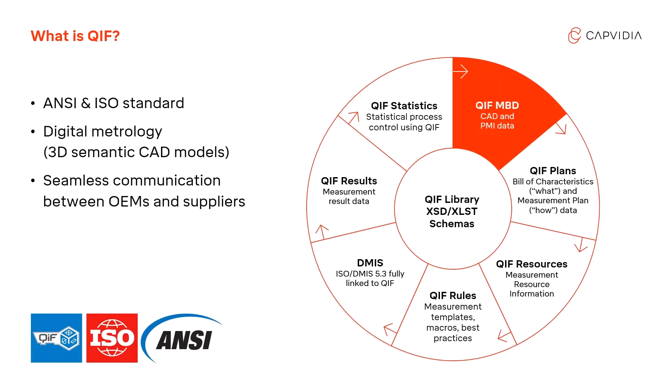You can think of QIF as a container for a lot of the information that's previously been kept in many other different formats. It contains visual part geometry, dimensions, tolerances, fabrication and measurement requirements, as well as inspection results. And it was created specifically to ease communication between suppliers and their customers. For now, we're going to focus on the question, why did you get a QIF file? Simplest answer to that question is model-based definition, or MBD.

To sum up MBD, when we say MBD, we're talking everything in the 2D drawing, dimensions, tolerances, notes, all of that is now in the 3D CAD model as the single source of all relevant product and manufacturing information, or we refer to that as PMI. Our focus with QIF specifically is machine-readable PMI.

What we mean when we say machine-readable is that you're not relying on a human to interpret the meaning of the requirements. So we're no longer relying on people to accurately duplicate design information that already exists when we get to the next step in our manufacturing process. Instead, we're transferring that information correctly and automatically using the QIF file.

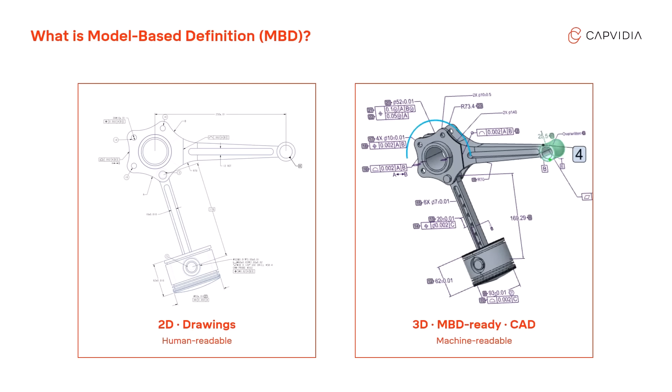The point of MBD, QIF, and all of these other Industry 4.0 buzzwords is really to enable automation downstream and reduce or even eliminate manual interpretation, the need for intervention, and the errors that come with those things. For example, ballooning hundreds of annotations on a part or assembly can take hours or even days to do manually, and often results in misrepresentations or misinterpretations. And machine-readable PMI is the start of a true MBD journey.

DoD mandates kickstarted MBD, and as a result of that, it's starting to cascade across manufacturing. Major OEMs like Lockheed Martin and others now publish supplier playbooks that outline their model-based enterprise strategies, and that includes model-based definition. And broadly speaking, that's why a QIF file just landed in your inbox from an OEM or a tier 1 or 2 supplier.

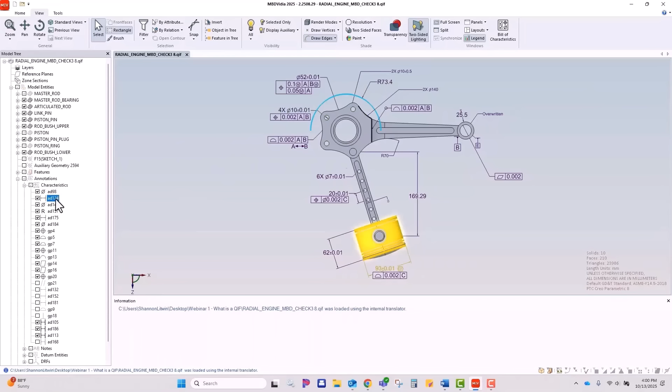If I want to go through each of these characteristics one by one, I can select each one, and this can be used for reviewing or for running various checks that you might want to do later. Now, all of these characteristics are what's called semantic annotation. Semantic annotation means it's not just human readable. You can also load it into an appropriate computer program like a CMM machine. We'll get to that later, and it will understand what these notations mean.

Another thing that I'll touch on very briefly are these saved views. Now, these views are akin to what you would find in a 2D drawing, and I'll go more into those in a little bit.

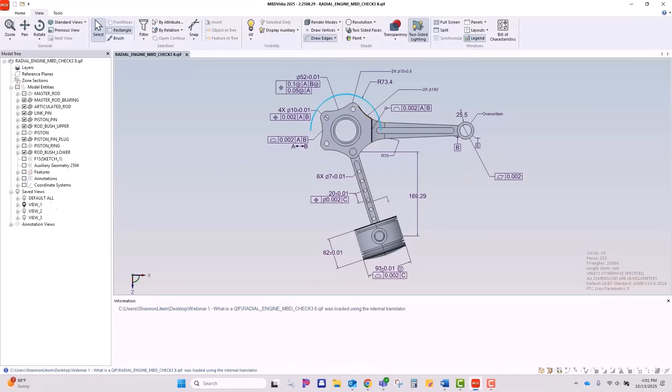Now let's move on to the bill of characteristics. Similar to if you had a two-dimensional drawing, each of these dimensions and each of these GD&T designations needs to be given a balloon number so that after fabrication is complete, you can go through each of those items and make sure everything is in spec.

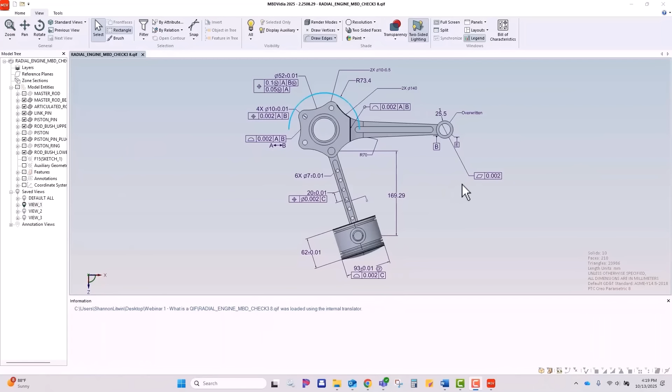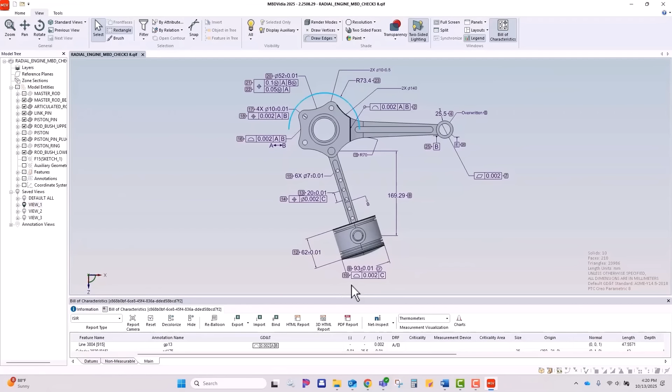So the easiest way to assign balloon numbers to all of these items is to go up to this bill of characteristics, click the button, and you can see that it has automatically added a balloon number alongside each of these items. Each measurement gets its own balloon, and then each GD&T marker gets its own balloon. And then it's also made the bill of characteristics visible. I'm going to change my preset to make it a little easier to look at.

And this bill of characteristics has everything that you need to manufacture this part. It's called Product Manufacturing Information, or PMI for short. Among the things that it has is what view a particular characteristic is saved to. It has a feature name, an annotation name, which ties back to the annotations I showed you over in the

model tree. It has the nominal value for any of the characteristics with the tolerance alongside it, and any GD&T that is applicable. It also has criticality, and if a measurement device is specified by the OEM, that will show up here as well.

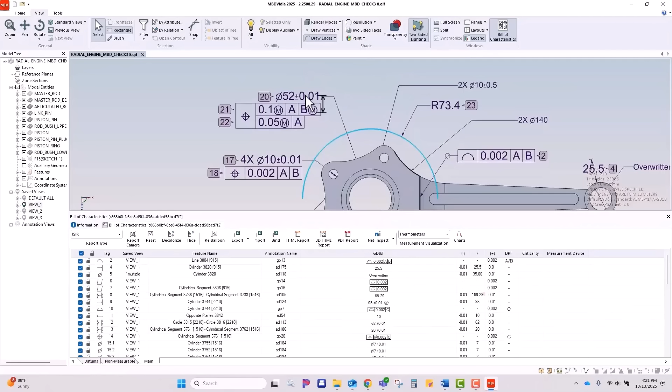Something that is really cool to note, if I zoom in here and click on this characteristic, it highlights it for me here in this bill of characteristics, and then I can do the reverse. Click on something in the bill of characteristics, it highlights it out in my visual space so that I don't have to go hunting for anything.

And now there are a few tabs down here. This bill of characteristics is split up into a main tab, which is your basic measurables, your non-measurables, which are going to be things like pass-fail items, and then any datums. And we also have the possibility of adding more tabs depending on what information your QIF contains. So for instance, if there were any notes in this, or if there were any welds, a notes tab and a welds tab would be added down here.

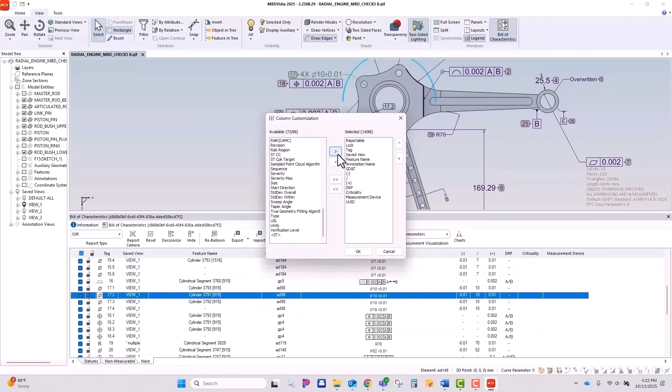Let me go back to the main tab, and there's one other thing I want to show you. So one thing that makes a bill of characteristics different from anything you could create by hand is something called a UUID. Now, this UUID is a completely unique identifier for every characteristic, and the bill of characteristics has its

own UUID as well. These UUIDs make sure that basically across all time and space, no matter what program you're opening this in, these UUIDs will carry over, and this bill of characteristics can be matched to its version in any other program, and so can each of these characteristics.

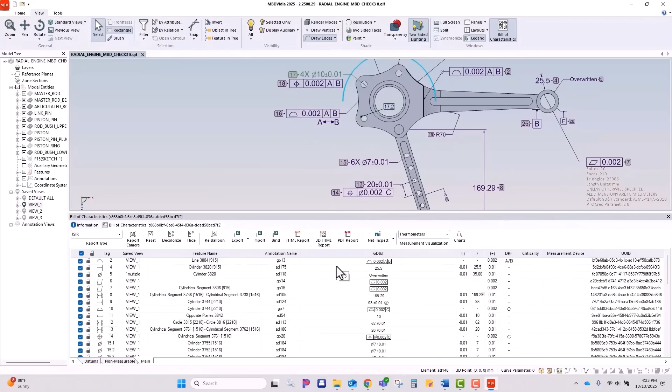Now that we have our bill of characteristics, there's a few things that you can do with it. The first you can do is export to an inspection report. There are a couple standard templates to choose from. If you're in aerospace or aviation, you'll be familiar with this AS9102 form.

We also have a welding report, an ISIR form, which is good if you have multiple serial numbers that you want to check all in one place. And then you can also add a customized form if the company you work for has a special form that they like to use internally.

So before I export, there's just a couple things I want to point out. We have this main tab, the non-measurable tab, and the datums tab. And you'll notice in this main tab, all of these checkboxes are blue, and in the non-measurable tab, all of these check marks are blank. Now, what this means is these blue checkmark items will be exported, whereas these items will not. If I want to export them, I can select which ones I want exported.

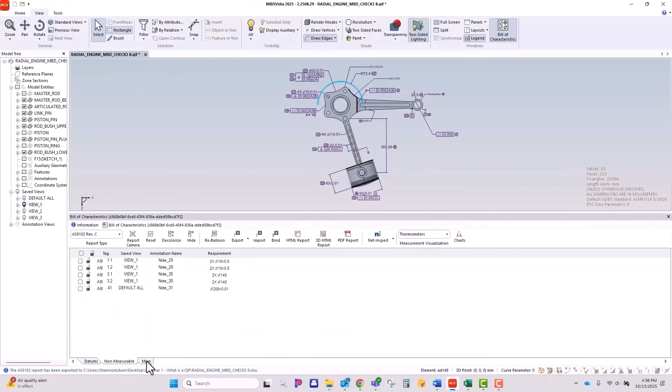I can select an entire category, but I don't really care about the non-measurables right now. So I'm just going to click the export button. I have a couple file types I can choose from. I like this one, so I'm going to export that. And it did check to see that I had a file by this name already. That's okay. I'm just going to replace it.

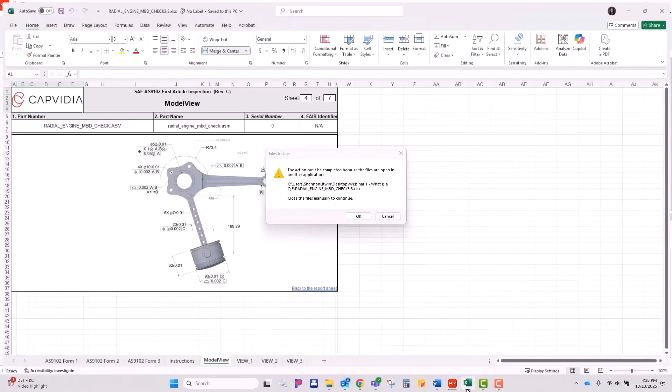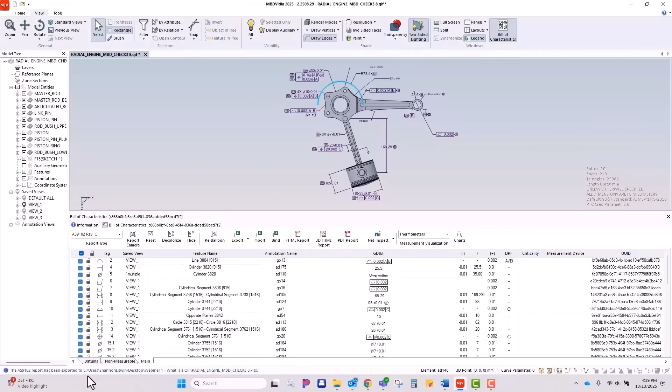As you can see down in the lower left, we have a progress bar, and that will show you the progress as it exports to an Excel. You can see now that it's finished because it's given me a message that it's done so. And so now I can go to where I've saved that, open the Excel, and now I have a good bit of information to look over.

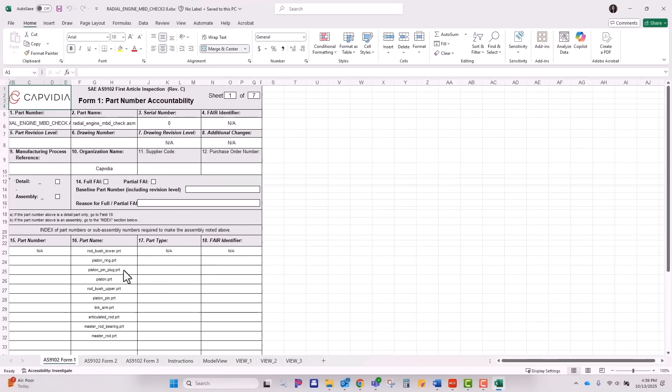So the first page on this AS9102 form is just your basic part information, like its name and any of the assembly items that went into it. Page 2 is going to be your material information, and then Form 3 is going to be each of those characteristics that was ballooned before.

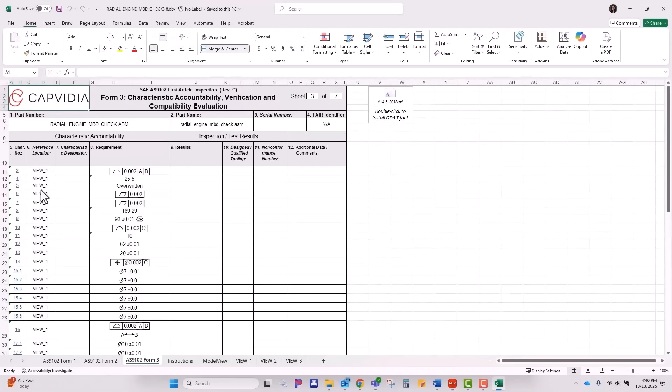And so you have the balloon number here in this leftmost column, and you'll notice that it has a link. So if I click that, that will take me to the view where that characteristic is found. And if I tab through each of these, I have view 1, view 2, view 3. And I said I would explain these saved views before, so the saved views in that Excel correspond to view 1, view 2, and view 3 that I have here in this model tree.

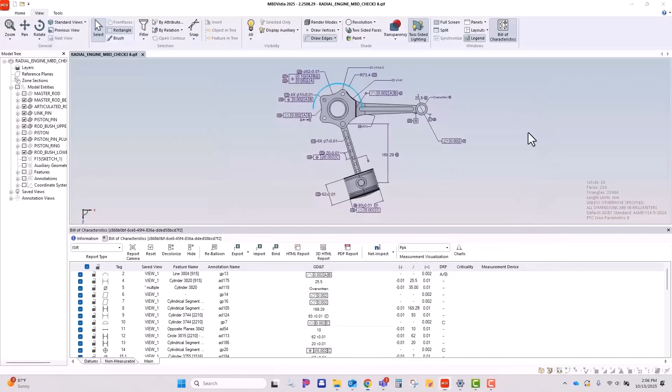In addition to generating an Excel report, you can also generate a 3D HTML report, which you can do by clicking this button here. Save it. Now, the HTML report is really good to have in addition to the Excel report. So you can see that generated pretty quickly. Pull it over from my other screen. And this is interactive. So you can see it has all of the characteristics that the BOC had. And it also has the same views.

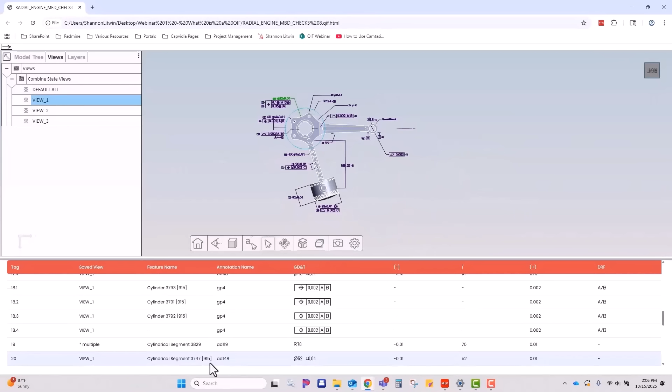So I can go to the default view, view 1, and then just like the BOC and MBDVidia, I can click a characteristic and it will make it highlighted down in this list. And I can do the reverse as well, bring that into view. This is really good for working on the shop floor. Say if you have a computer that you want to pull up the QIF file while you're running the inspection.

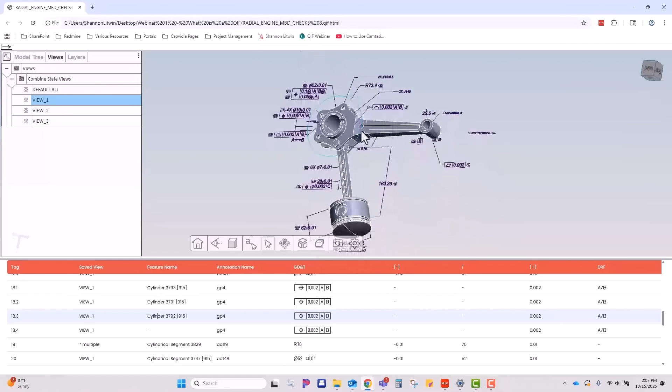It's also good to send around to other people who might need it, like procurement, if there are various parts that need to be bought that are a part of this subassembly. And none of them will need to have an MBDVidia license to view the HTML report. And so that can be opened in any browser, including on a tablet or phone.

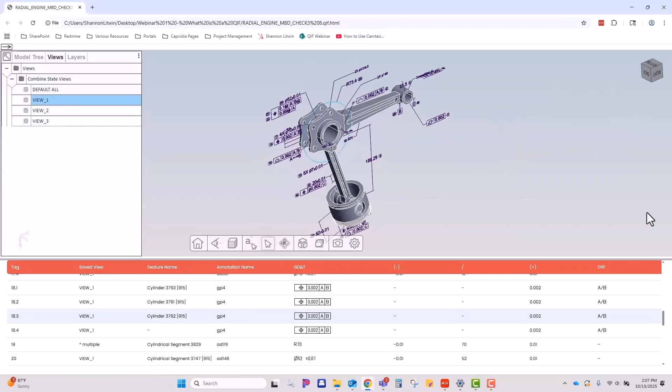Now that you have your reports, you're ready to machine your part. Now, a lot of times the technical data package that the OEMs send you will contain a QIF file and a step file. But in the event that it does not contain a step file, you can go to the Save As button, select File Type as Step, Save, and then if you want to check on the step file you just created, you can open that here in MBDVidia as well.

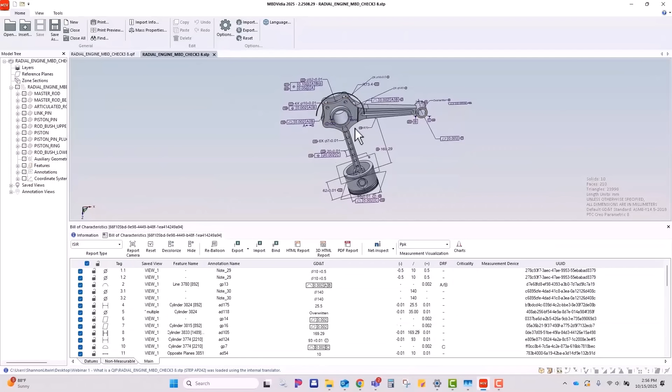So you see here we have the step file. It looks exactly like the QIF file you just had. That is because MBDVidia will automatically select STEP 242, which will hold PMI information very similar to the way a QIF does. Now, if your CAM machine cannot process STEP 242, you can export to a different step format. You would just have to change that in settings.

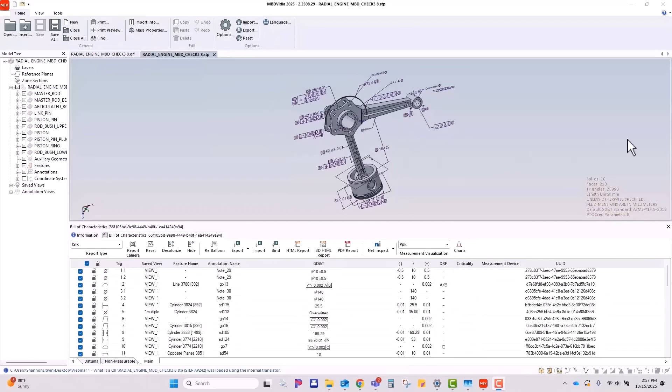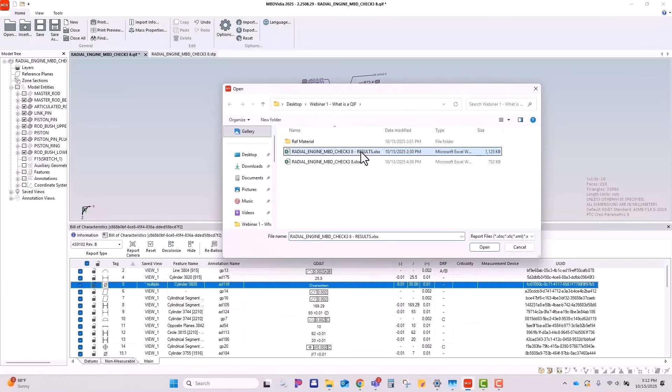Now, the big advantage of a QIF file is that once you've completed fabrication and you've performed your inspection, you can import results back into the QIF file using MBDVidia. You do that by clicking the Import button, selecting your results file, which is just going to be the Excel file that you filled out earlier, and that will use the UUIDs that we mentioned before to make sure the results are paired with the correct characteristics. So as you can see, it created a results column from the file that you imported.

And that's one way of getting results into MBDVidia. Another way of importing results is if you use a CMM program like Calypso or PC-DMIS. If you do inspection that way, you can use a QIF file to program the inspection, assuming that the software package you have is recent enough. Once you have those results, go to the Import. You would select whatever results file you have. Since I don't have one, I'm just going to select Cancel. But if you did have a results file to import, that would also create a column.

Now, as you've noticed, there's different colors that these results show up as. Green means you're well within spec. Yellow means you're technically within spec, but you're getting a little farther away from nominal than you might like. And red means totally out of spec, not good. We also have visual representations of these results. I'm just going to use the thermometers.

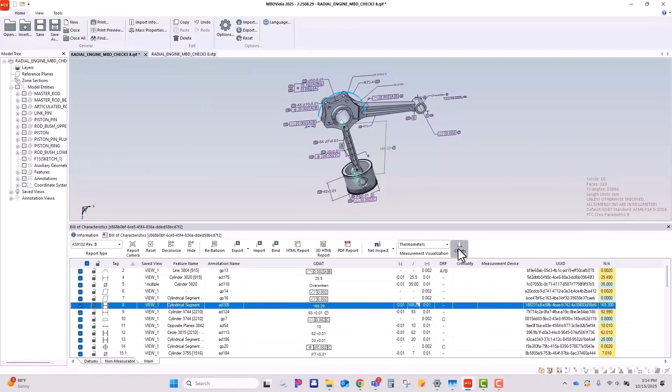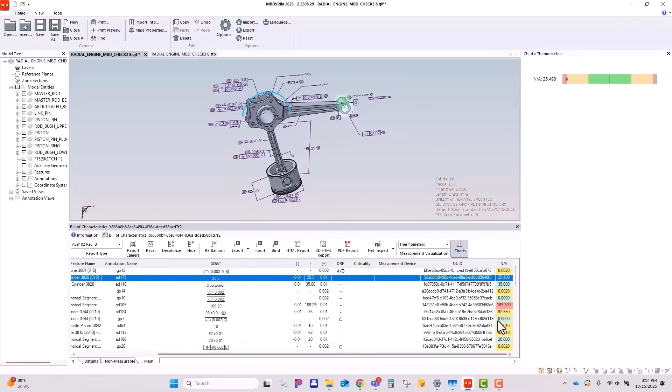And the thermometer is going to show your nominal in the middle, surrounded by a green section. Yellow is when you're getting close to where you don't want to be, and red is outside of tolerance. I can go through and click on any of these. Let's find a green one. And so that one, the nominal is over on the left-hand side because there is no tolerance on one side. There's only tolerance on the plus side, not the minus side.

The other thing you can do within the MBDVidia environment: we have a partnership with Net-Inspect. So if your OEMs want you to upload results to Net-Inspect, we have a button right here that will do that.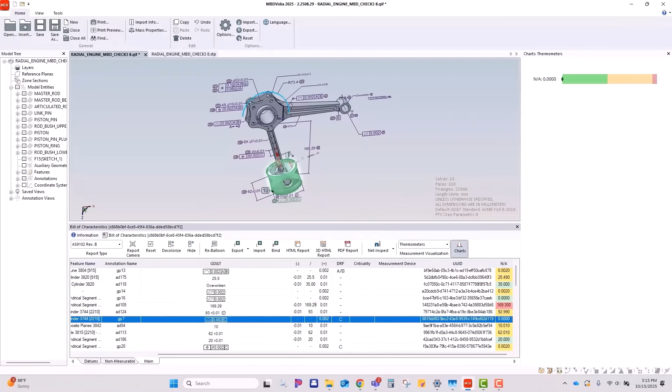Okay, let's turn the charts off. And the last thing I want to show you is our revision control. So I'm going to go back into the folder where I got my original QIF from. Now I have a revision saved in it. Now this revision was created from the original CAD software. I did that outside of the demo and I put it in here.

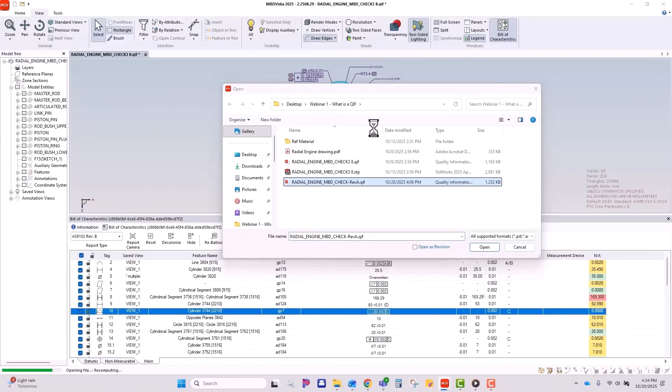So I'm going to drag and drop this over, close that. And so now I have the Rev A version opened. You'll notice it looks very similar. There are a few changes, and I want you to take note of this triangle. This triangle, the delta symbol, designates that there is a difference in this particular characteristic. So if I hover over it, you'll see the type of difference that's been changed.

So in this case, it's the number of decimal places in the geometric tolerance value. If I scroll down, I can see a few more. The differences on this one are the min and max value have changed. Same thing with this one. Scroll down a little further.

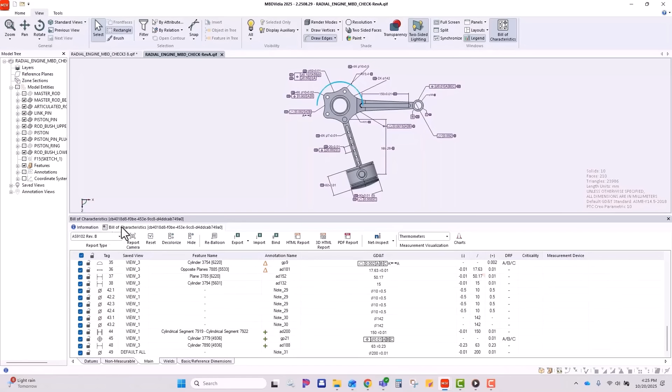Now these plus signs mean that this is a brand new characteristic. It did not previously exist. It's not going to show me anything if I hover over it because there's nothing previous for it to compare it to. The last thing I want to show you about revision control, up here next to the Bill of Characteristics tab is this Information tab.

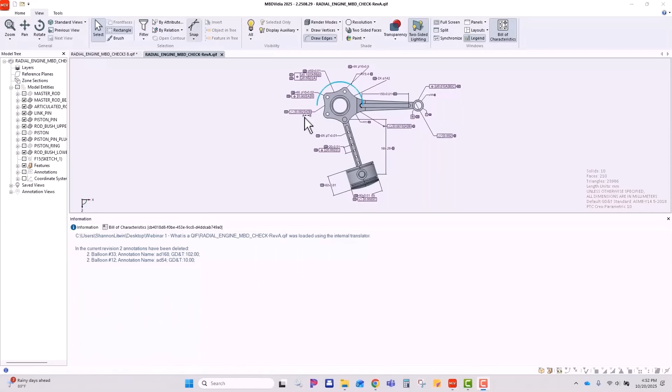If I click on this, it will show that I just opened this file, and it will show me that balloons 33 and 12 have been deleted. So those characteristics are now gone from this part, and from now on we will be moving forward without those balloon numbers. Okay, that concludes our demo. Now back to the presentation.